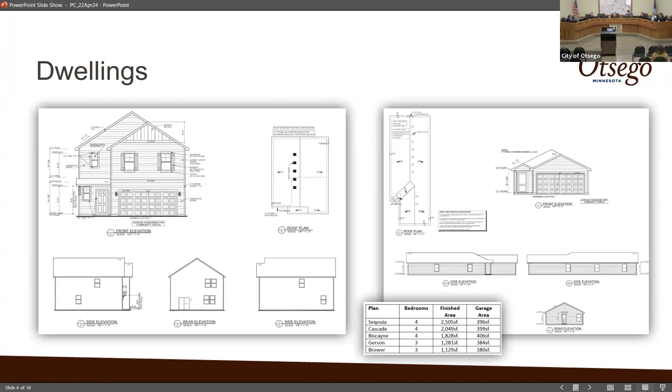So for the most part, they'll be screened by the larger structures, and they are somewhat consistent with the layout of the homes in Windsong as well.

The industrial use of the property includes 15 buildings within 160,000 square feet of space. Each of these has multiple tenant bays. The developer is intending to incorporate and allow for enthusiast garages throughout the project, and also business opportunities for small trades and contractors to use those for their business location.

Versus, as we often find, people's driveways, garages, or pole barns in the city. So this provides opportunity as an incubator almost, to locate those businesses into appropriate locations.

That's a clarification too from the Planning Commission, and the reason you have the revised condition of approval outlined. When we initially wrote this up, our assumption was that the enthusiast garages were located only at the southwest corner of the project, but their intent is to locate the business and enthusiast garages all throughout the development, which from a use standpoint doesn't necessarily cause any conflicts or concerns from staff's perspective.

It probably makes things easier from an enforcement standpoint, because if you ended up having somebody with an enthusiast garage in there, then it would be an enforcement issue.

Lot requirements are met in terms of the overall project for an I-2 district requirement. The building coverage is just over 12%, so well within the 50% allowed. They do meet the setbacks required from wetlands, and also the roads on the west and south sides of the property.

Off-street parking is generally handled, and the analysis was similar to that of a mini storage, where there isn't going to be full daytime occupancy of these structures. Someone's going to come get their equipment and go do an off-site job, or use it from the enthusiast garage standpoint. Each of the buildings is more than 50 feet apart, so there is space if someone pulls up short term in front of their structure to load, unload, etc. There are also off-street parking stalls adjacent to the clubhouse areas. So from a use standpoint, staff is comfortable with the availability of off-street parking as shown.

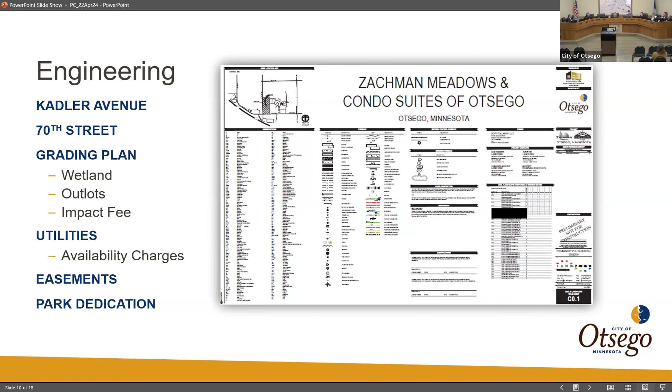Park dedication requirements: this area for the residential uses is served by Kittredge Park within the Kittredge Crossings development slightly to the east. That is connected by sidewalk, so there is connectivity and access for that. So park dedication, both for the residential and for the industrial portion of the development, would be paid and satisfied as a cash fee in lieu of land at time of final plat.

City staff is recommending approval of the application based on the land use being consistent with the recommendations of the 2023 comprehensive plan. We also recommend approval of the PUD district as it's consistent with the intent and purpose of the zoning ordinance implementing the comprehensive plan for this area. The performance standards set forth by the PUD district also mirror the intent of the base regulations established by the zoning ordinance.

Planning Commission held a public hearing at their meeting last Monday, April 15th. There were a number of residents present from the Windsong and Kittredge Crossings neighborhood, mainly with concerns about timing and typical questions we get when there's new development adjacent to existing. One of the bigger discussion items was over traffic and how traffic within this neighborhood would be accommodated. We explained that Kittredge Parkway is designed as a 46-foot wide collector street, even though it serves a much smaller area than it would typically serve and serves much lower traffic volumes as a result.

From that standpoint, staff is comfortable that traffic is adequately addressed, but you also have the draft minutes of the Planning Commission included as part of your packet for reference. After taking public comments and Planning Commission discussion, the Planning Commission did vote 6-0 to recommend approval.

Possible actions for the City Council this evening would be consideration of ordinance 2024-05, amending the zoning map to establish the PUD district, and then approval of a PUD development stage plan and preliminary plat, which would be subject to now 33 conditions as recommended by the Planning Commission and amended here this evening.

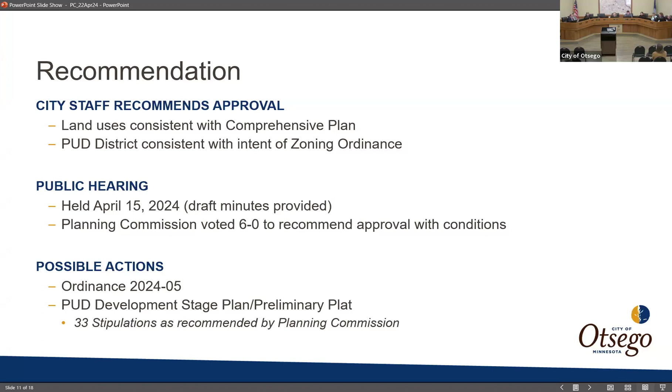I'm Craig Delansky from Boyd Delansky, my business partner Scott Boyd. I'm Craig Delansky, lifelong resident of Elk River, Minnesota.

Starting with the residential project, Zachman Meadows, something we're proud of, working together with Lennar, a respected builder that's done a lot of work in Minnesota that we're happy to be aligned with. In honor of the Zachman family we bought this property from, Kenneth and Margaret, we named it Zachman Meadows. They wanted to maybe have a street or two named after them, but we couldn't do that part. But the project is named after them in honor of their families.

So the residential project, it's 115 lots like Dan explained. And I know they've got some different model types that are going to be well suited. We could have done something with apartment buildings there, but it was just something we didn't want to be part of. Not that there's anything wrong with apartment buildings, but we like the idea of single family residential homes.

We also feel like it complements our Condo Suites of Otsego project. We have 3 different product types, and we did that by design. When we analyze this arena, this product is very popular in different parts of the United States. It's taken off more so in Minnesota.

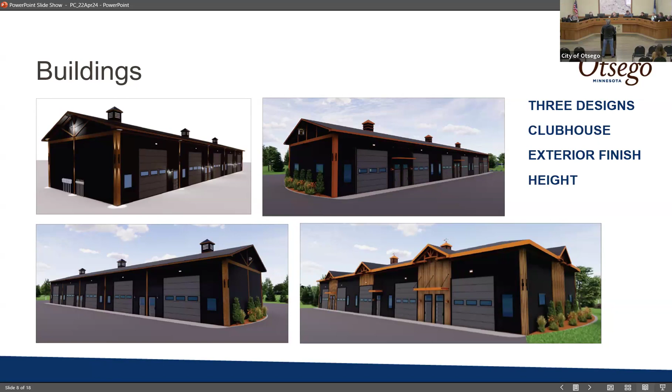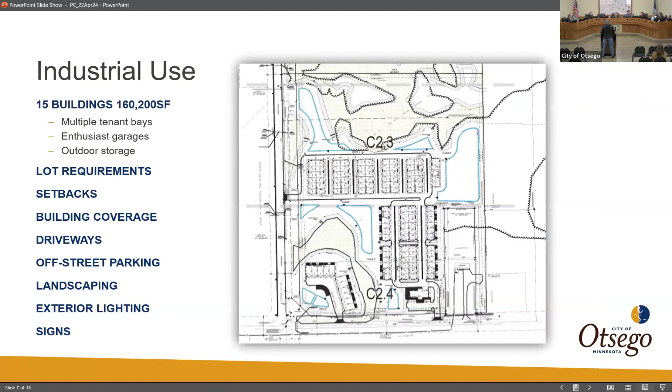Madam Mayor, can we circle back, Dan, to the separation from the property and the county road, and just the distance? I know you touched base on that and mentioned that obviously this is a project down the road, but what is the distance - do you know what the distance has to be from the road?

The city would have required that under its use of the roadway as a collector, industrial collector street, so we require 40 feet of half right of way for the roadway, which is effectively what's there today as it was initially constructed. The county, in order to fit a potential roadway in the future, asks for 150 feet of right of way, which would accommodate a 4-lane road. So they're going to dedicate the 40 feet plus another 35 feet of right of way for 75 feet. Then from that point, the residential lots and the house are set back another 30 feet.

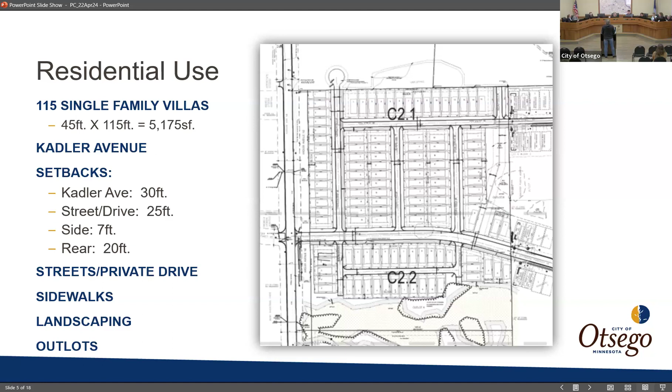Thank you for clearing that up again. And then I also had another question - we talked about the Greenway Trail and that's how they would have access in this area. Can we show on the map where they go? Where would we have to go if I lived there?

If you're living here, you would most likely take the sidewalk along Kittredge Parkway down to 70th Street to the east. The future Greenway corridor would be along this creek, just to the north of Kittredge Crossings, which would get you to Kaleidoscope School. And then from there, Callan goes north and out at 77th Street to get you to additional trails as well.

I only asked because there's no trail on Kadler. So the trail on 70th goes to Callan. And then the Villas at Kittredge Crossings is going to construct that trail between Callan and Kittredge Parkway, as part of their second phase. That gives you the trail connection, so if this comes in, the first person living here can get to a trail at Callan and 70th Street by sidewalk, and then out to County Road 19 in whichever direction.

I meant Kadler and 70th, there's no connectivity along that way, like we just talked about. When we looked at it, there's no destinations along that route, and no connectivity further to the east. So there isn't a lot of need for a residential trail in that area, and all the houses are to the north. This area is wetland, and there would be significant wetland impacts. So if anything, there might be opportunity in the future to go through the wetlands, if there needs to be a trail along the buffer.

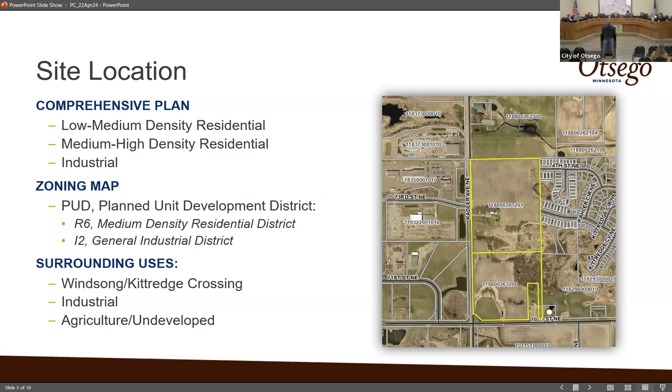Otherwise, if there's no more questions or comments, a motion will be in order.

Mayor, can I make a motion? Sure can. Motion to adopt Ordinance 2024-05 to approve a zoning map amendment and to approve a PUD development stage plan and preliminary plat for Zachman Meadows, subject to the stipulations as stated by the findings of fact and decision as presented.

Second. Motion by Jeff, seconded by Brittany. Is there any discussion?

All those in favor signify by saying aye. All those opposed, same sign. Motion passes. Thank you. Thank you, Madam Mayor. Thank you, council members.

All right, moving on to item 5, Park and Rec. Item 5.1 is Ashwood.

Hello, Mr. Jacobs. Good evening, Mayor and Council. One second, you're so tall. Yeah, Ms. Grindle's going to need to lower it. I know, she knows how. She did it at the Park Commission meeting.

I hope you guys all had a chance to review the RCA written. We did go out, you guys remember in March we had Tim from HKGI come here and give a nice presentation on Ashwood Park, how that 2.1 acre park on the corner of Ocean and O'Brien is heavily wooded, and we're trying to preserve those trees and incorporate traditional play elements and nature play elements. The good news is we did go out and requested bids, got 6 back, and the bids we got back were within budget, and we were able to also accommodate the request.

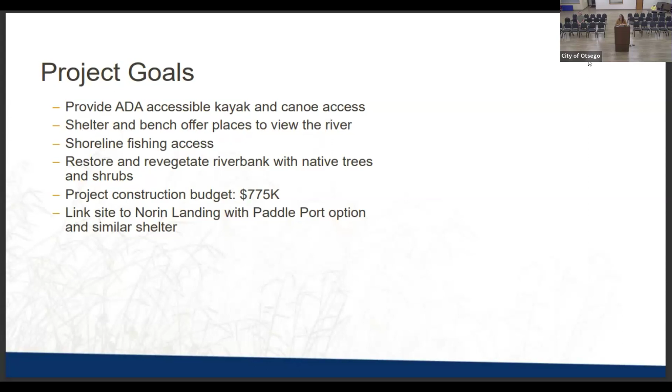Next slide. Again, some of the requirements as part of the grant is that all of these elements are included: the kayak canoe launch, the river access, shore fishing, and a small boardwalk providing access from the existing shared use parking lot to the site, going over the rain garden area. We have a nature observation area with the shelter, deck, and overlook. There are a few paved trails added for accessibility, some signage, and the shelter. Part of the grant also requires we use all Minnesota native plant species for landscaping, providing habitat for pollinators.

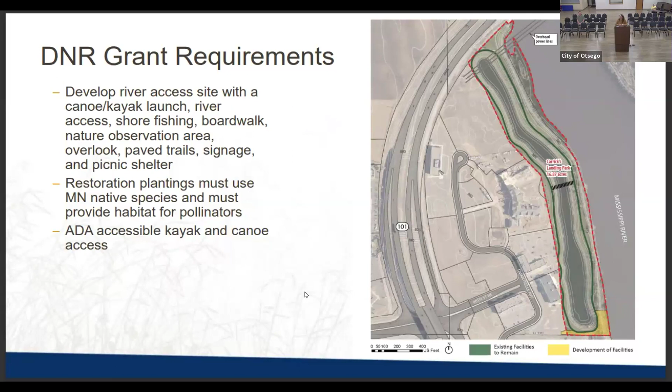Next slide, showing the site plan layout. We've gone through several different iterations, making sure we can fit everything into the riverbank, meeting the ordinance requirements and the DNR requirements. We're showing the boat launch, steps going straight down to the river just north of the shelter, and the accessible path to the north with the accessible dock and kayak launch. On the western side by the parking lot is the short boardwalk over the rain garden. There will be a portable toilet installed on a new concrete pad, and signage at both the parking lot and over by the river side.

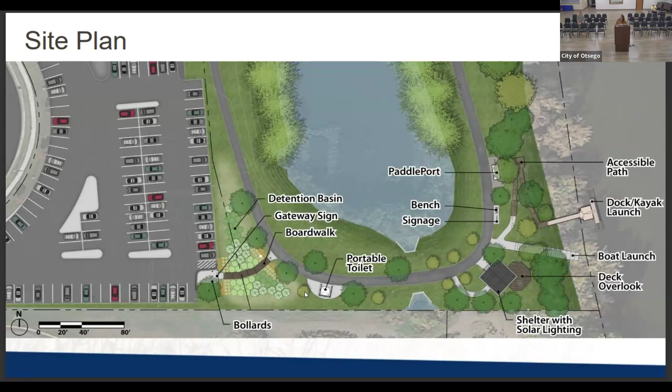This shows in a little more detail the parking lot access. We are removing one parking stall from the existing parking lot and recommending adding an ADA parking stall because it is an ADA accessible site. There will be a new gateway sign, shown on the right side, a concept for what that looks like. We're trying to match the signs recently installed at Prairie Park. This one is a little bit larger, so it brings attention from the parking lot to the new kayak and canoe launch.

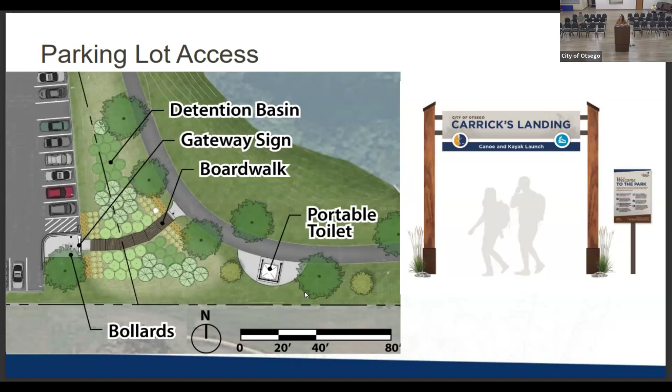Moving over towards the riverside, you can see on the left side of the screen there's a kiosk sign, which matches kiosk signs that will be installed at Prairie Park. There's also a bench located right next to the sign.

To the south, there is a shelter, which will have a couple steps going up to it, along with an ADA accessible sidewalk on the west side going up to the pad that the shelter is on top of. Then there's the deck overlook, a boardwalk or wooden deck that overlooks the river.

The boat launch is 8-foot wide concrete steps, about 2 feet each tread, so it's a leisurely walk down to the river's edge.

To the north, there is the ADA accessible ramp. This will be installed by Marine Dock and Lift, the same vendor that installed the dock just north at the Elk River's edge. So it is accessible, and we can choose the paint colors so it can blend into the site and have a more natural feel and look.

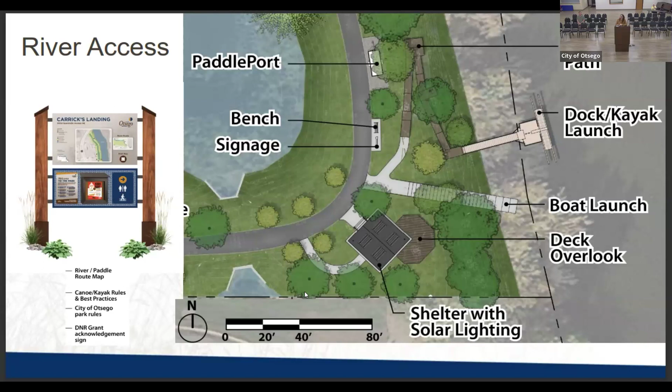These are some images of what we're specifying for furnishings on the site. On the left side is horizontal fencing that will surround the porta potty. We are also specifying some black metal bollards that will be located at the parking lot to prevent people from driving onto that boardwalk and onto the trail.

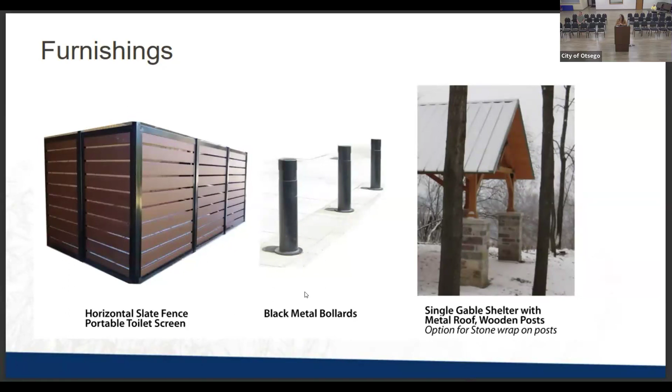The image on the right is showing what the shelter would look like with a single gable metal roof and wooden posts. Next.

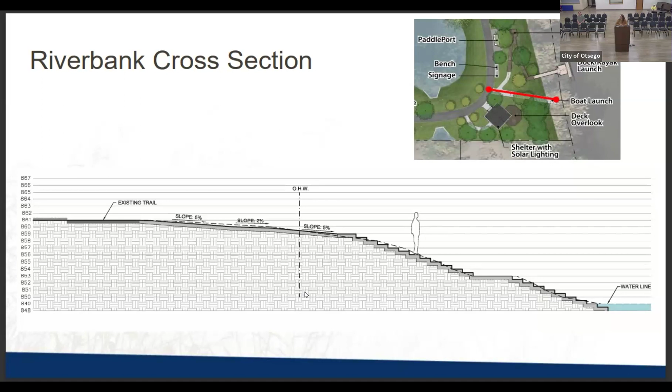This slide shows the steps, so the boat launch itself will be steps that you can walk down to a landing a few feet wide, then steps that go all the way down into the water. We're trying to mimic the existing slope as much as possible, because this is meeting the same requirements as essentially a boat launch you'd drive into the river, but the DNR is allowing this by saying it's similar, just bumpy. We're getting away with it by making it fit into the slope.

And then these are some images from Marine Dock and Lift showing what the ADA accessible kayak and canoe launch will look like.

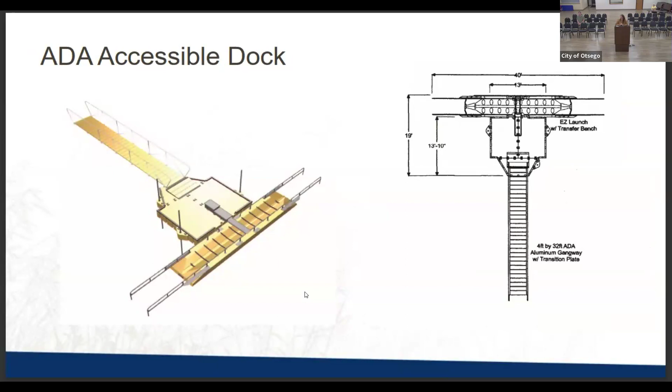Next slide. This is the construction cost estimate. With all of the items included, we are identifying direct purchase of the boat ramp, the accessible ramp, and the kayak and canoe accessible launch separately from Marine Dock and Lift. The signage will also be a separate contract with the sign vendor. With all of those costs included, we're looking at around 760,000. Hopefully bids will come in good, but that's where we're at right now.

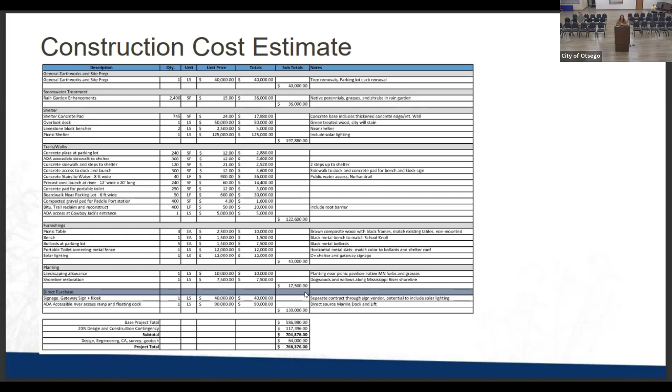So next step is to put this out for bidding, and then the bid opening hopefully May 22nd, with awarding the bid potentially May 28th.

Any questions? I have a question for Nick. So I know we're putting the bollards in so we don't have people come in off that south side where the signage will be. But where will staff go in there to get around, and now with this porta potty down there, how will they be entering to get down to clean that up?

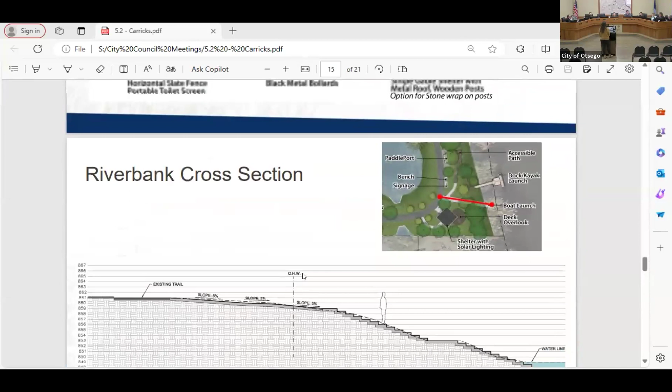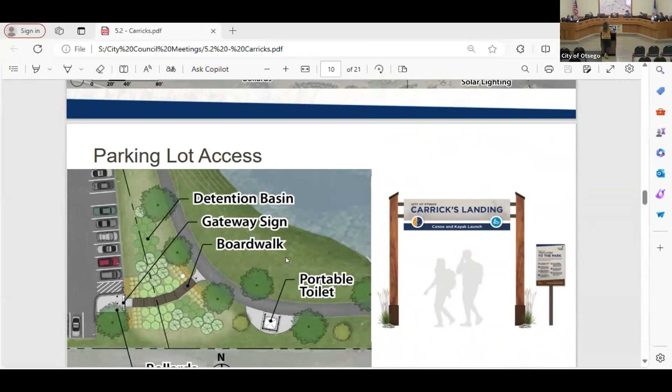So where they're getting on now is what those people would continue to use. This plan does include a lot of improvement there for a truncated dome, restoration, all that. Mayor, can't we use removable bollards there? I think the point is it's a boardwalk going across softer ground, actually an elevated boardwalk, so it can only handle so much weight. Any vehicle of a certain weight would wreck it, so we have to keep it so only pedestrians use that.

So how are they going to clean out the porta potty, that's the question. There's an access point where you're at Cowboy Jacks, between Cowboy Jacks and Guardian Angels. We're gonna make that ADA accessible at the front of that, but that's where the pickups or the truck would go in to get to the porta potty. Then there's another access, kind of angled to the north, so that's your access in, and your access out would be on the north side of Guardian Angels. There's another one that goes out towards the cul-de-sac at the north end.

I understand now, the boardwalk is going over the small section there, the rain garden, yes. But they can get there through pavement. Correct, it's just gonna be a bit of a drive. The whole thing is a mile, so they'd have to trek all the way around, but again it's only a half mile to get there and a half mile to get out.

Mayor, there is a restroom there on the site. This is no change of operation.

I just wasn't sure with this boardwalk. I thought this isn't something that they can drive on if you're putting these in. We don't want residents trying to drive down there. We put a bollard on the other side too, to keep people that happen to be driving, for whatever reason, from crossing. It shouldn't be only staff, but if someone is driving on the opposite side, they can't drive across it the other way.

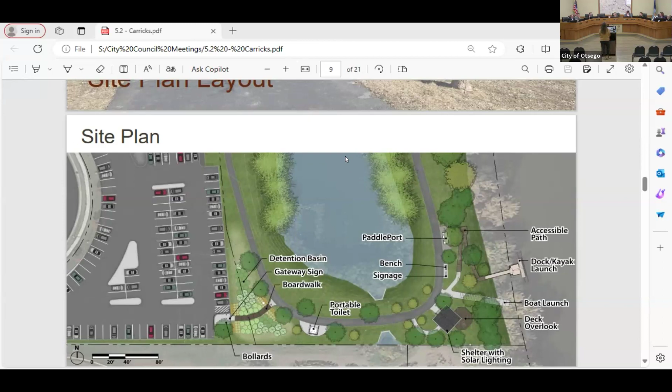I'm trying to figure out, on the north side, how are they going to get in if there's a block there? There's not going to be one there, he's talking about one here and then the two right here, but there's nothing up at the top. So they're not putting any up at the spot that's currently how you get into this park, up by Cowboy Jack's. Is that what you're saying? Correct.

Madam Mayor, Ryan, did you have any other questions? Nope.

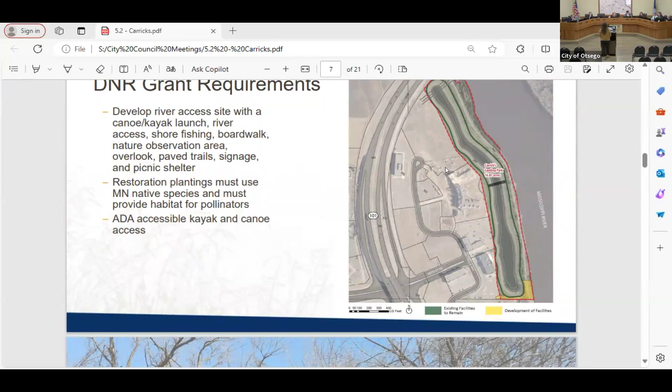What is the typical bidding time? It just seems like such a small window. Is this appropriate, to have a May 22nd bid opening? I'm just curious what the timeframe or window would be. I believe it's 30 days. Yeah, three weeks of advertisement. And that's state statute that guides that process.

I was one step behind with that, never mind. Mayor, with Quest CDN, we would put out the advertisement immediately.

Okay, any more questions or comments? A motion would be in order.

Mayor, I'd like to make a motion. Motion to approve the plans and specifications and authorize a competitive bid process for the park improvements at Carrick's Landing Park. Second. Motion by Jeff, seconded by Brittany. Is there any discussion? All those in favor signify by saying aye. Aye. All those opposed, same sign. Motion passes, thank you.